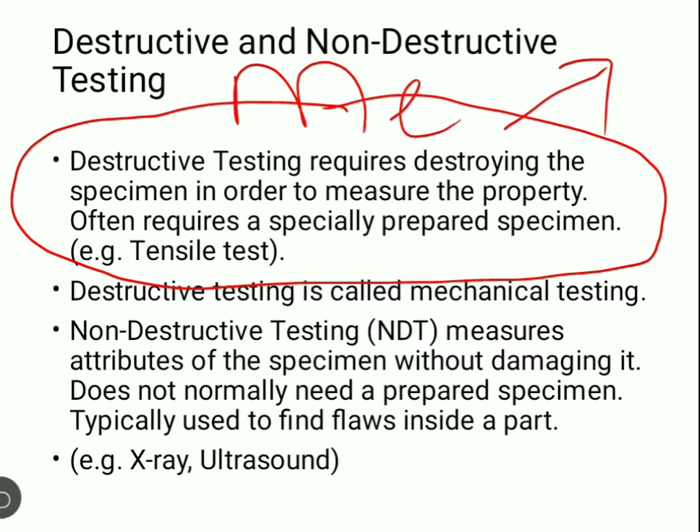Now destructive tests are generally called mechanical testing because we are finding out the mechanical properties of that specimen from the test. Now what are the mechanical properties? We have seen in the last video what the mechanical properties are.

We can see there is resilience, strength, stiffness, then hardness, toughness, fatigue, creep, ductility, malleability. All these properties are nothing but the mechanical properties of the metal. So we are calculating the mechanical properties from destructive testing.

Now you see non-destructive testing. It measures the specimen without damaging it, and does not normally need a prepared specimen. So we can carry out the test on the component also. Whatever component we are preparing from that metal block, we can directly carry out this type of testing because there is no destruction.

Now we can see they are used to find out the flaws in the part. What we can find here is the quality of the component. So by using non-destructive testing, we are finding out the quality of the component or the metal.

Quality means what we have to find is the flaws. Flaws may be defects. There may be cracks. There may be density difference. There may be thickness difference. All these things we can find from non-destructive testing. Examples given are X-ray testing and ultrasonic testing.

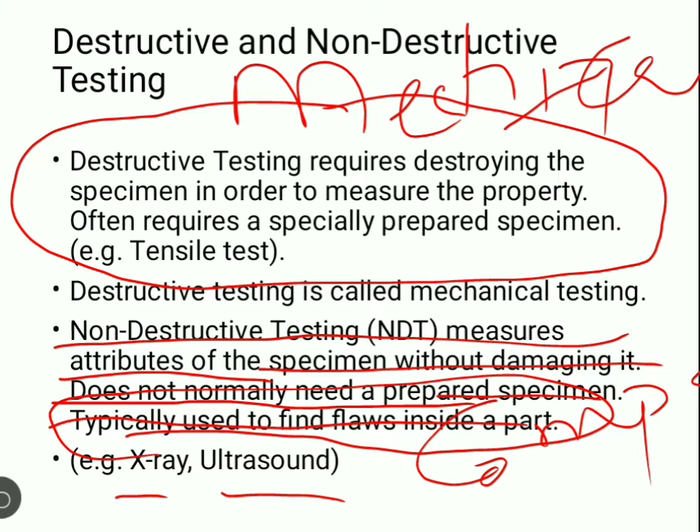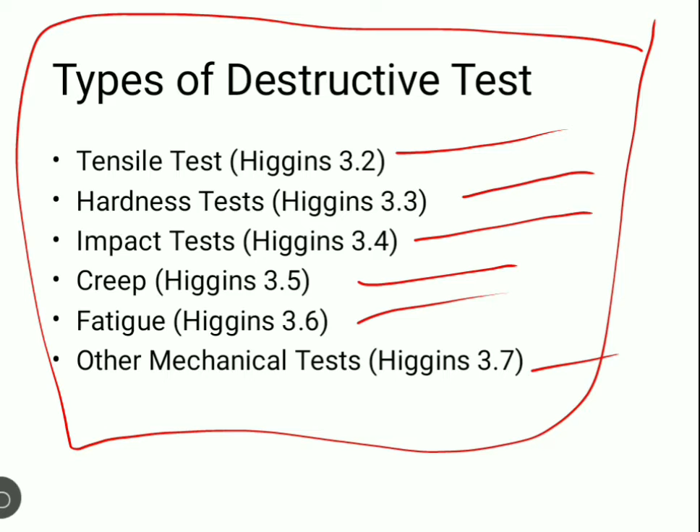Now we go forward. Various types of destructive testing are available. We can see tensile test, hardness test, impact test, creep test, fatigue test, and other mechanical testing. These are the types of destructive testing. Now first we will see what is tensile test.

You know what a tensile test is? A tensile test is nothing but a test where we take a specially made specimen and apply a tensile load on that specimen. Here we can see this is the specimen. So we are applying equal and opposite direction load on that specimen.

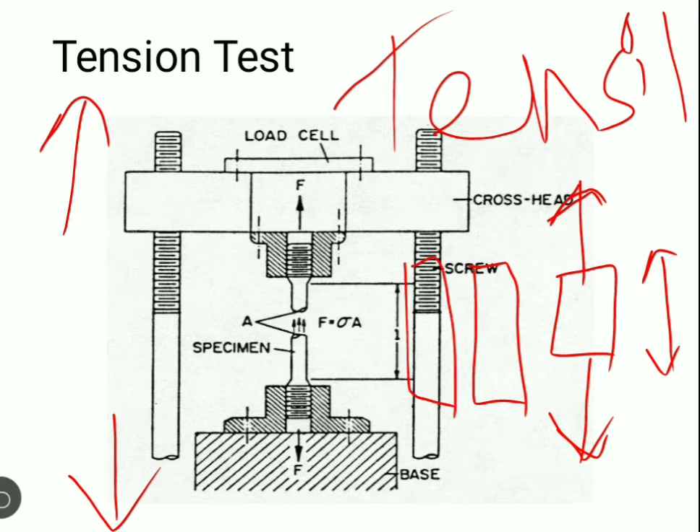If you apply an equal and opposite load, that is a tensile load, the length of that specimen will increase due to the tensile load. If we continue increasing the load, the length will increase, and after a certain time it will break at the center. So this is a tensile test.

When we apply a tensile load on the specimen, we have to measure the various changes in that specimen and record them. So it is called tensile testing. For that, a special testing machine is there, called a universal testing machine, where there is a provision to apply a load on the specially made specimen, and we can calculate various properties after that testing.

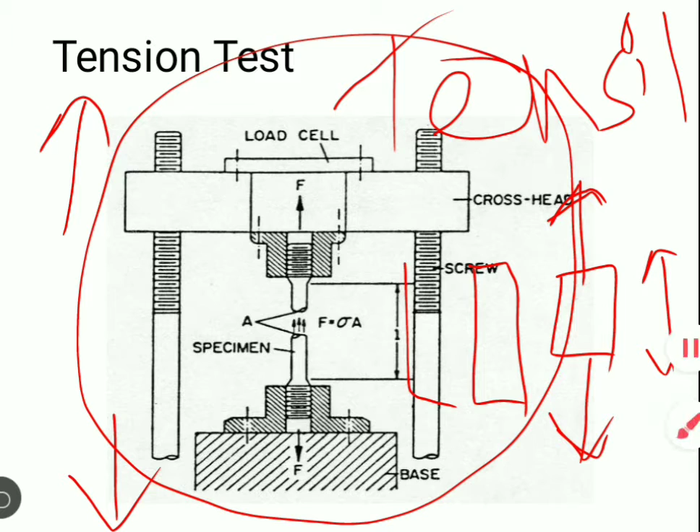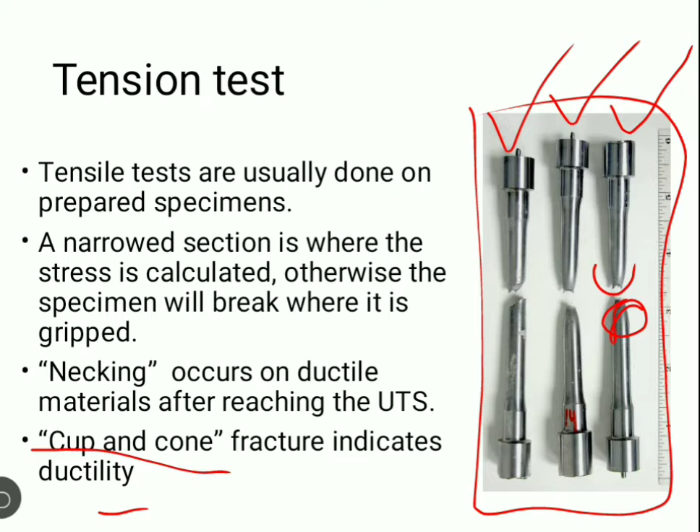Now what is elastic region? When the load is applied, the change in the dimension will take place. When we remove that load, the specimen will regain its original shape, and that is nothing but the elasticity of the material. So this is up to here. The specimen will change the dimension after application of load, and if we remove the load, it will regain its original shape.

Now at a certain point, if we go on increasing the load, it will not regain its original shape, and it will convert into the plastic region. So there will be a plastic deformation. The length of that specimen will go on increasing, and at a certain point neck formation will start. After neck formation starts, if we again increase the load, then the fracture will occur.

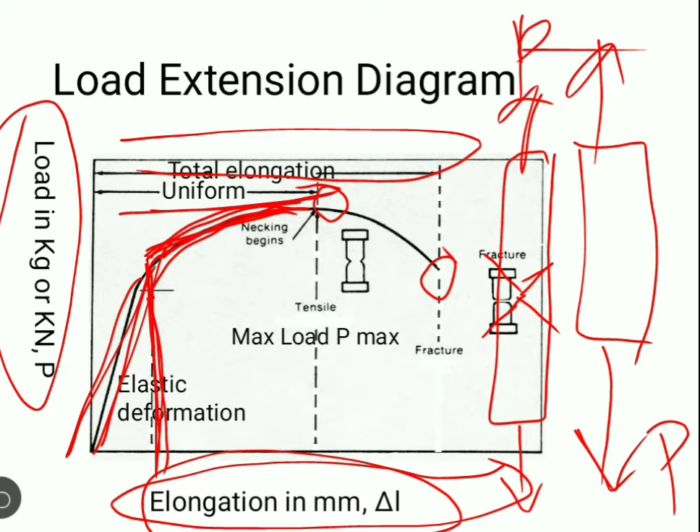That is the different types of region we are getting. Now we can see up to here the uniform elongation is there, then there is a total elongation. Here on the x-axis we are seeing the elongation in mm and load in kg on the y-axis.

Now this can also be studied by drawing a stress and strain diagram. Here, instead of the elongation and the load, we are considering the values of stress and strain. Now we can see what is the stress and what is the strain. The stress is nothing but the load applied upon area, and similarly strain is nothing but the deformation of the component upon the original length of the component.

So what is the stress then? Stress, from the formula itself, is load applied upon area. It can also be defined as: when an external force is applied, the body will try to resist this load, and this resistance is called the stress developed in the body, which automatically opposes the force applied on that specimen.

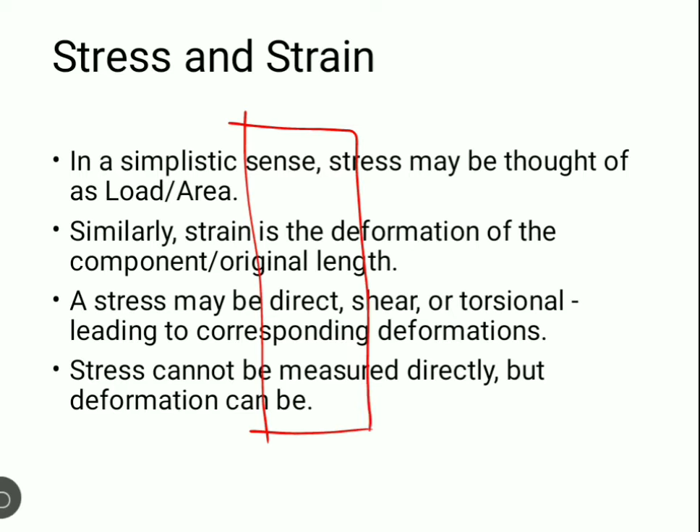Now you can see when we apply a load, or we can see the diagram, these are nothing but the load. So if we apply equal and opposite direction, the length will increase. So how can we find out the stress? Load applied upon area, and strain is change in length upon original length.

So from the diagram we can see two types of load have been applied on the same specimen. What happens here? When we are applying a load equal and opposite on the specimen, the length will increase. So change in length is delta. So some change in length will be there, and from this diagram we can find out the two values, that is stress and strain.

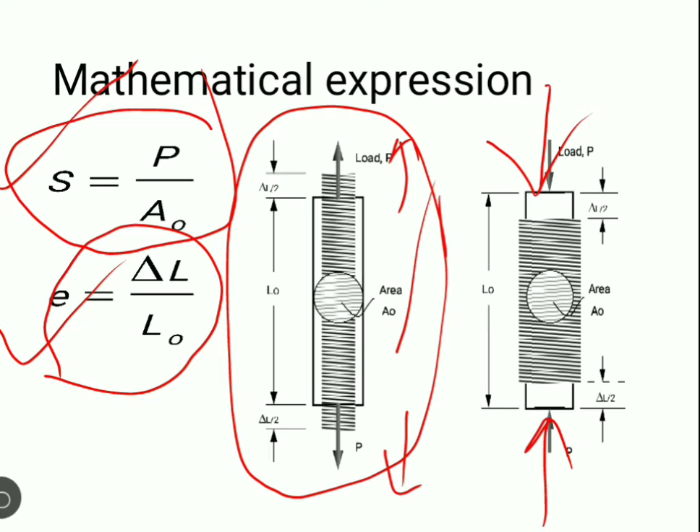Same thing if we apply a compressive load, that means equal in the same direction, the length will decrease. So from this phenomenon also we can calculate these two properties of stress and strain. The only difference is that the types of loads are different here. When we apply tensile load, the length will increase, diameter will decrease. When we apply a compressive load, the length will decrease and diameter will increase. So correspondingly the value of stress and strain will change when the loads are different.

Now from this there are types of stresses. Tensile load: when we are applying a tensile load in equal and opposite direction, stresses will be developed in the body, and they are called tensile stresses. When we apply a compressive load, the stresses developed in the body are called compressive stresses. And when we apply a shear loading, the stresses developed are called shear stresses.

Now what we can see here, when a tensile load is applied in equal and opposite direction, the stresses developed are called tensile stresses. Then when in the same direction, a compressive load, the stresses developed are called compressive stresses. Now what is shear then? Shear is nothing but the moving of the upper layer of a specimen on the lower layer.

Now what will happen here if we apply a load like this? Tangentially we are applying a load on the specimen, then the upper layer of that specimen will try to slide on the lower layer. So after application of load, the specimen will look like this. So sliding of the specimen's upper layer on the lower layer is taking place. This type of movement is called shearing, and the stress developed at that point is called shear stress, and the corresponding strain is called shear strain. So these are the types of stresses.

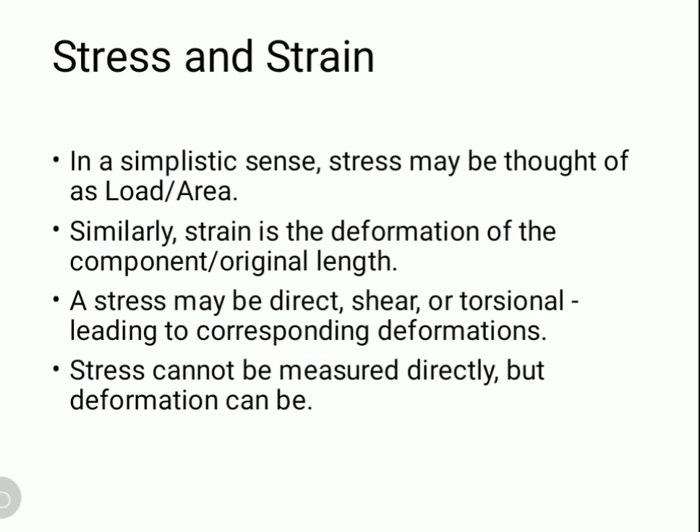Now we can see that after application of load we can plot each and every point of the loading. Okay, now we have to plot one point. So when we are applying a load of 10 kg, equal and opposite tensile loads, we'll get a value of stress by the formula P by A, and we will plot that point on the graph. Correspondingly, we will get the value of strain. Likewise, we can go on increasing the load and we get this type of curve.

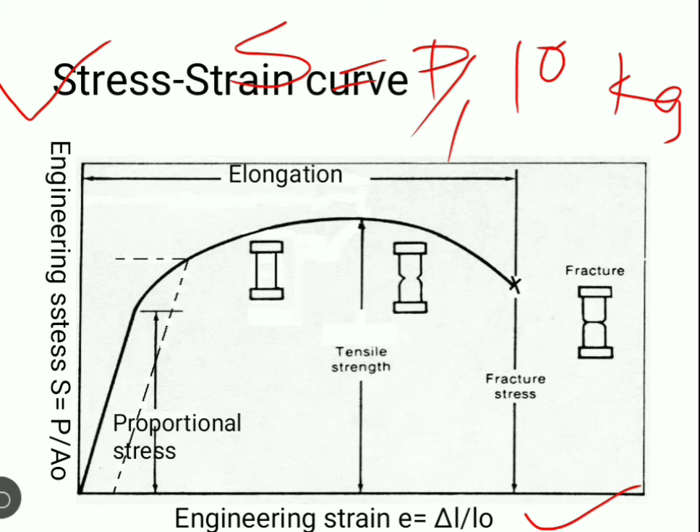So this curve is saying that we can get various regions or various points, and those points define the mechanical properties of a material. Now we can see the elongation, the elastic region. This is called the plastic region. This is the elastic region. From that elastic region we can find out the Young's modulus or stiffness of a specimen. Then we can find the strength of the specimen, and we can also find the ultimate tensile stress.

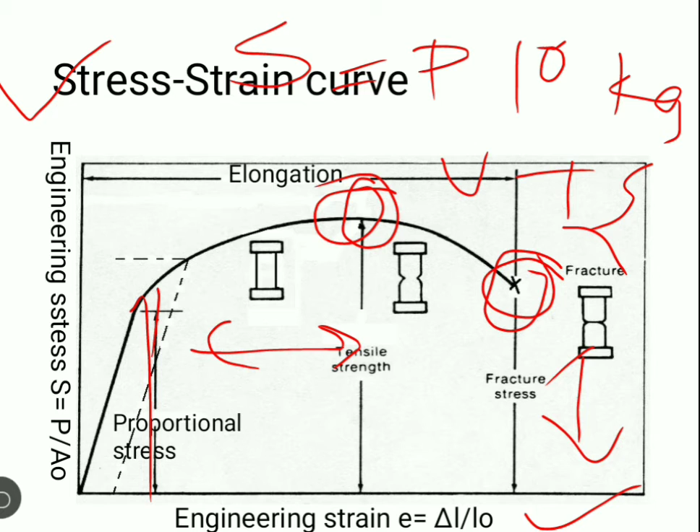Ultimate tensile stress means nothing but the maximum allowable stress that the specimen can have in the plastic region. It is called UTS, ultimate tensile strength. After that necking will start and we get breaking. So the stress at which the metal fractures is called the fracture stress, and the maximum allowable stress in the plastic region is called the ultimate tensile stress. Again, elastic stress and proportional stress will be there. All these properties we get from the tensile test on the specimen in the stress-strain curve diagram.

Now we can say one more thing. From the load extension diagram, what we get is the yield, the UTS, which is nothing but ultimate tensile stress, breaking, fracture, elasticity, plasticity, and necking. After application of load, we get the elastic region, plastic region, then the breaking region. Necking starts after that, in the necking region. So from the load and extension diagram we can find out these types of properties of a metal.

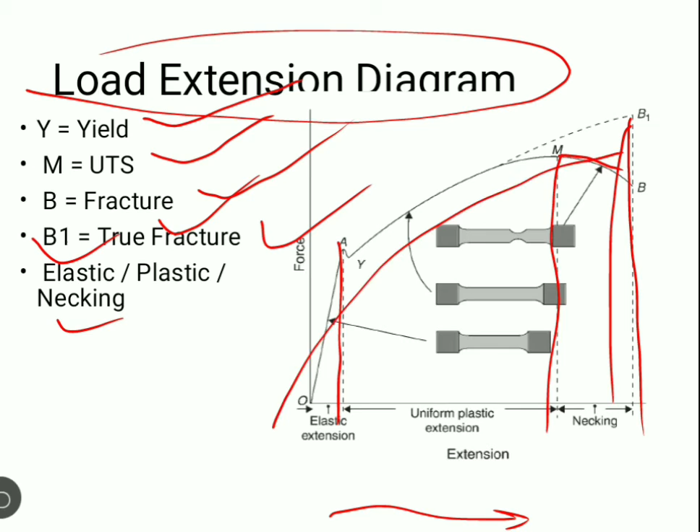From this we can find out the ultimate stress, that means how much the material can be stressed within the plastic region. That is a mechanical property. Then fracture stress: at what stress value the material will fracture. What is yield stress? It shows at what point of stress the material is converted from the elastic region to the plastic region. And proportional limit means up to what point the graph shows linear behavior, that means stress is directly proportional to strain. So these are all the values that can be calculated from the stress strain curve diagram.

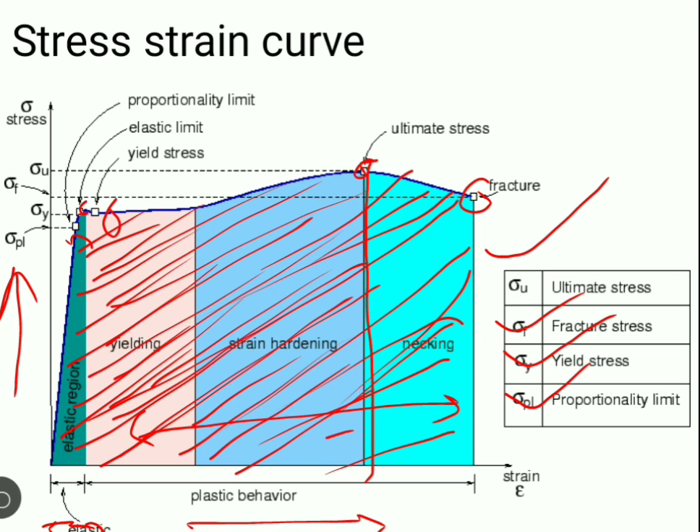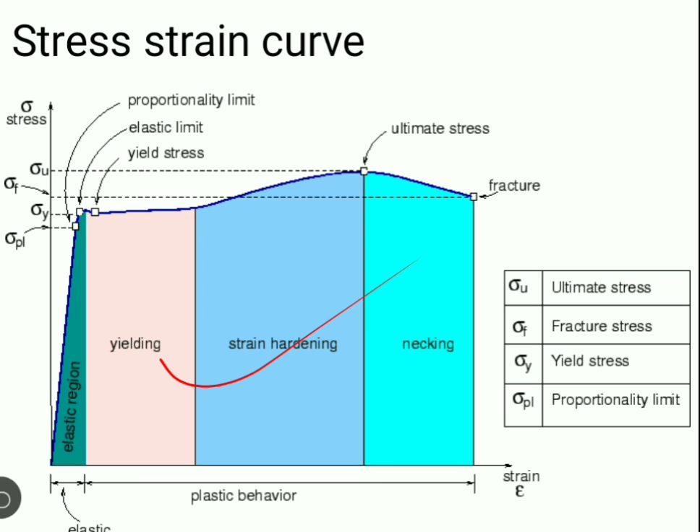Now what is toughness? Toughness is nothing but the ability of a material to absorb force before its fracture. So the area under the whole stress strain curve is called the toughness of that material. So these are all the properties we can calculate from the stress strain curve. That is the use of the stress strain curve, and we get that stress strain curve from the tensile testing machine. Now you can see different graphs of the stress strain curve.

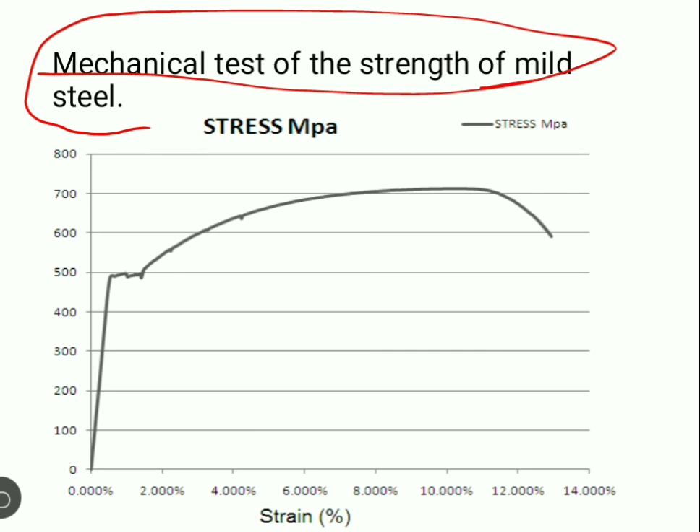So we will get different values of ultimate tensile stress, yield stress, proportional limit. The elastic region will be different for different materials. The plastic region will be different for different materials. Breaking stress will be different for different materials. Ultimate tensile stress will be different for different materials. So from that curve we can find out the mechanical properties. So this is all about the tensile testing machine.